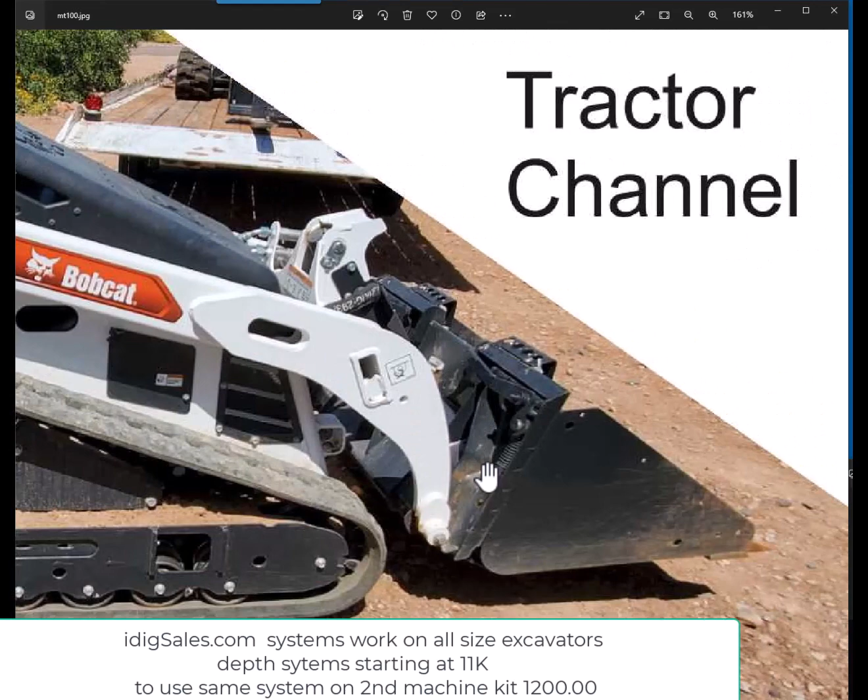But let's get back to this mini skid steer and go through what this first video is going to contain for you guys - it's going to be real simple. What we're going to look at, and the first question that everybody asks when you're even thinking about buying one of these, is what kind of mount is on the bucket? What could I mount to that system? Will I be able to use - say I already have a Kubota tractor with a quick attach front bucket - will I be able to use those buckets on this little mini skid steer? And others of you are going, why would you want to use a 5-foot bucket or a 6-foot bucket when, okay, the beauty of these machines - this one right here is little under 36 inches wide.

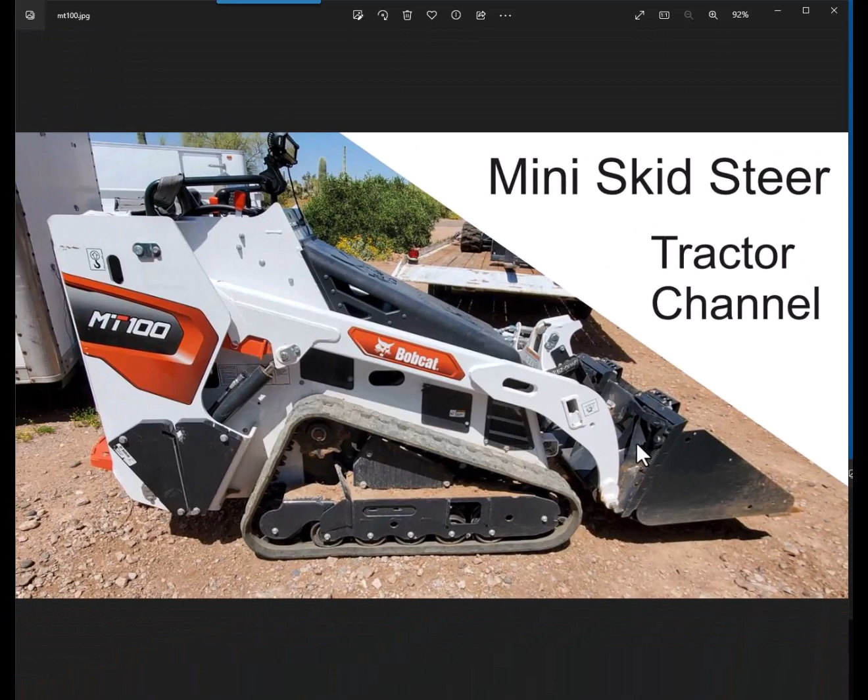This one actually has the narrow tracks on it. You can get a wide track model, I think it's 42 inches, but this bucket is 36 inches wide from outside to outside, so you can go through some pretty small gates with that.

Now, if you have a 42-inch bucket, 44-inch bucket, 5-foot bucket, or 6-foot bucket off your skid steer or tractor, say you've got to do some work in somebody's backyard. Well, you can put your fork attachment on here and put your bucket on there, and then have your bucket going long ways, go through the gate and use it like that. There's a lot of different scenarios why you would want to actually do that.

Let me show you one here. Say here's an MT100. This has got a 60-inch bucket, and this bucket is actually an old Kubota bucket that came pin style, that we actually welded a quick attach onto just to be able to use it for something, because the tractors get converted to the quick attach, and then these old pin buckets aren't good for anything. But anyways, this is a 60-inch bucket.

So say with this mini skid steer, mini track loader, you want to maybe move dirt with it, and you're loading it with an excavator. Here's a pile of dirt, there's an excavator sitting right behind it, and the guy's taking the dirt with the excavator and putting it in this bucket right here. Then they're able to move a lot more dirt with that 60-inch bucket versus the 36-inch bucket that you would normally have on there.

Now, if you were going to actually do some grading and some real dirt work with that, I would put the 36-inch tooth bucket back on there. It's going to do a lot better than this big, huge bucket. This isn't even a tooth bucket, but for loading and moving dirt, this bucket's really good because it has a real good capacity and it's easier to load with the excavator.

Now, another thing to show you here on this one, this is a tilt mechanism off a full-size Bobcat or regular size skid steer loader quick attach, which means it could actually tilt this bucket left or right. And you can see how much wider it is in the actual configuration of the mini skid steer itself.

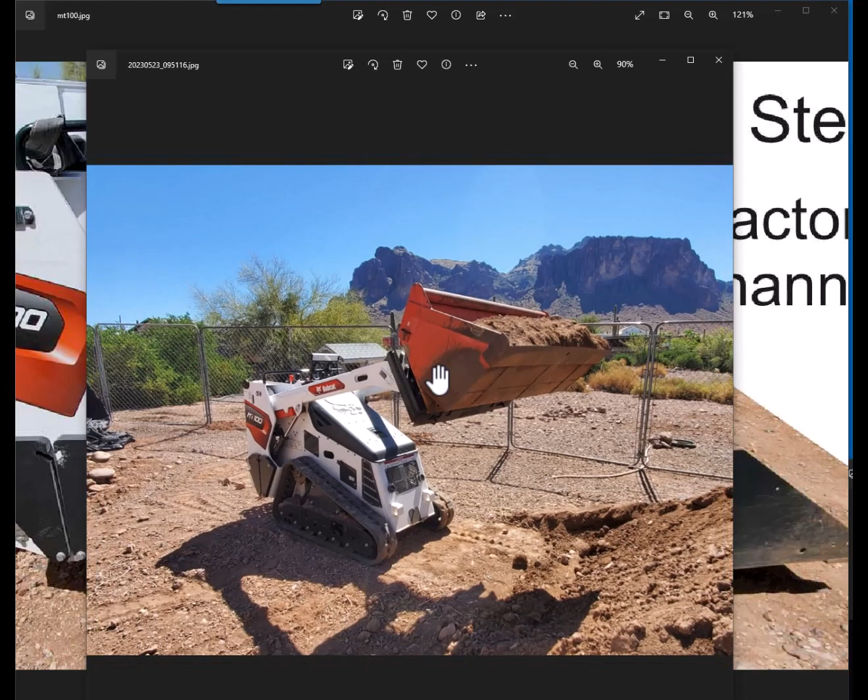But all I've shown you here with this picture is, if somebody asks why would you want to put a big bucket on, well, that's the reason you'd want to put a big bucket on, or you might want to even put on a full-size grapple on your machine. But let's get back here.

What we're talking about here is this comes with a mini skid steer quick attachment system. Now you see these two levers here, just like the full-size skid steer, just like your Kubota tractor, just like your Kioti tractor, but this is only 30 - this whole male mechanism that goes in the angle on the top is not quite 36 inches wide. This bucket's 36 inches wide, so this part has to be less than 36 inches wide.

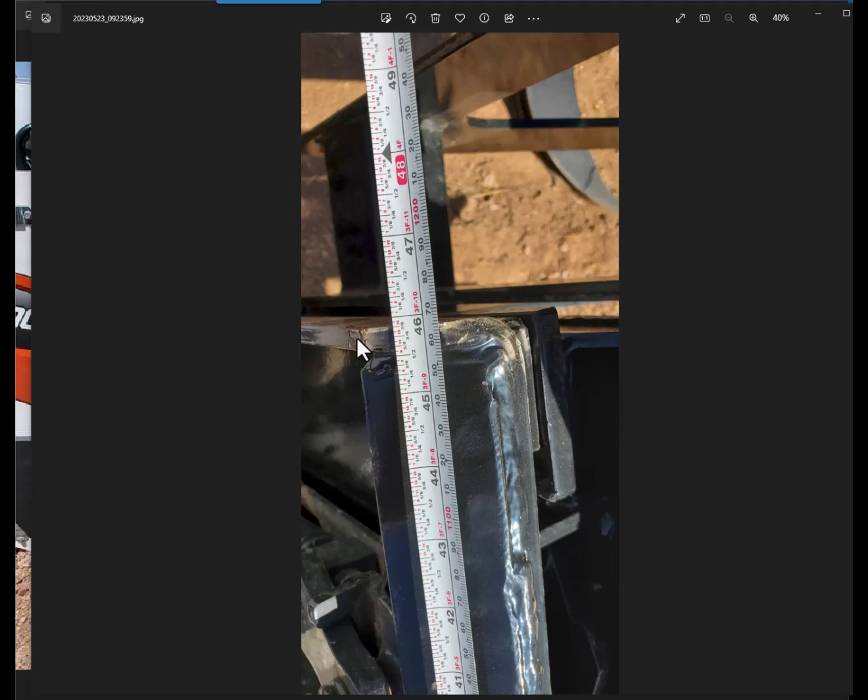So what is the size of a normal one? Let me bring this picture in right here. So this is a normal size skid steer looking down from the top at where your quick attach hooks up. Here's the edge of it right here. You're about 45 and a half inches, which is the widest hookup you would be able to get into that type of system.

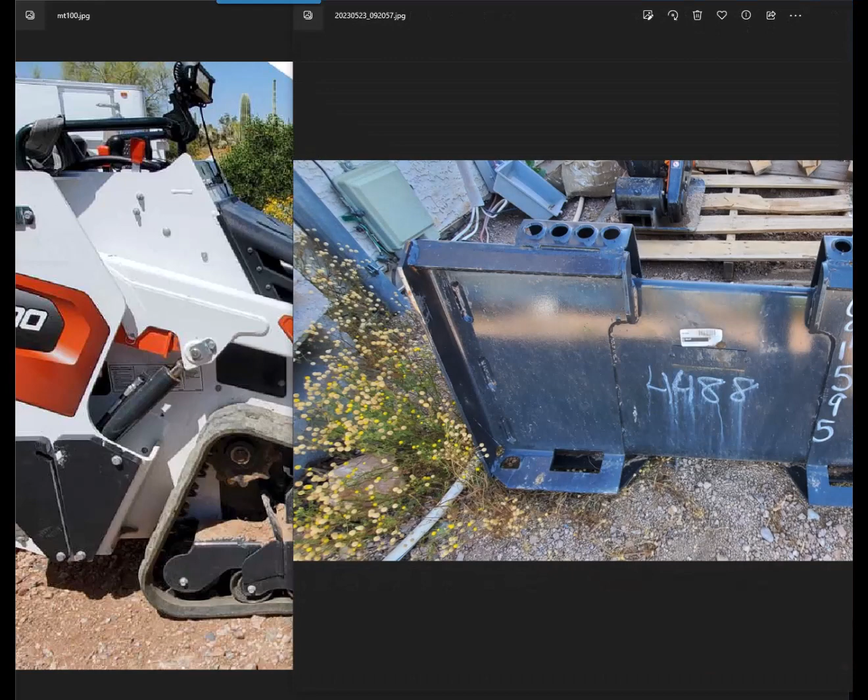Now what I mean by that is when we look at this picture, this is a mini skid steer - well, it's an attachment, I think it's an attachment for the hydraulic hammer. So a hydraulic hammer would mount to this.

But what I'm getting at here is between these two edges, you would have to be about 35.5 inches to be able to hook up onto this. If you went into this with a full-size skid steer, which you're going to be at like 45.5, you're not going to be able to hook up to a mini skid steer bucket. I'll show you here, this picture right here probably explains it a little better.

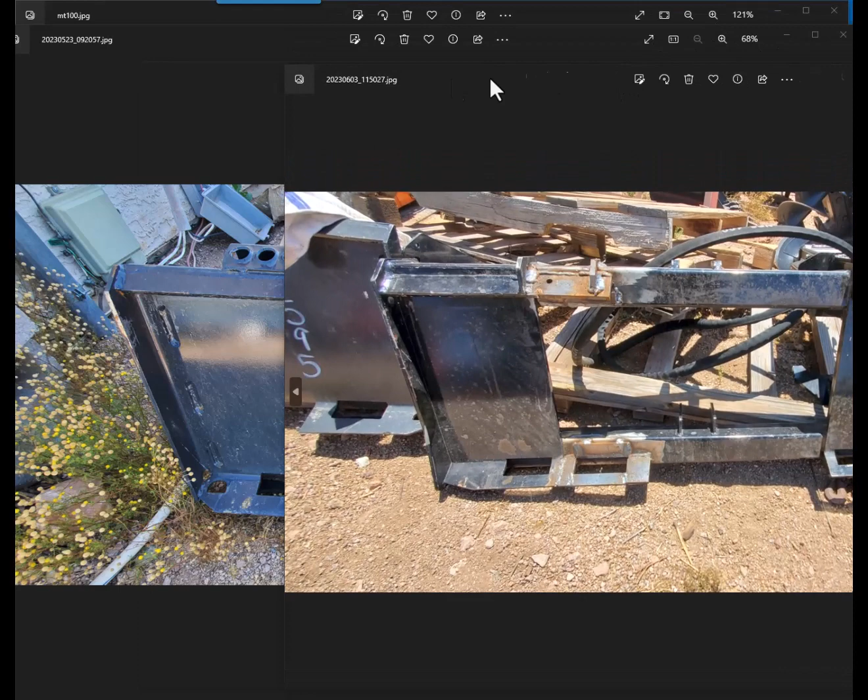Okay, so in this picture, we're looking at a Land Pride low flow auger, post hole auger. It's kind of hard to see, but the auger part and the bits are right over here on the right side. This is made for a full-size tractor, like a Kioti or Kubota. If you look at it, you can see there are 3 holes on the bottom here. The 2 on the outside were there, they came with the 2 on the outside.

The reason being is that your Kubota and Kioti tractors, for hydraulic flow, are probably putting out 6 to 9 gallons per minute. It's low flow. But the Bobcat MT100 puts out about 12 gallons per minute, so you're able to use this on the MT100. It works perfectly fine. Now if you wanted to use that on a full-size Bobcat, full-size skid steer, you're going to be having too much flow, because a full-size skid steer puts out a lot more hydraulic flow.

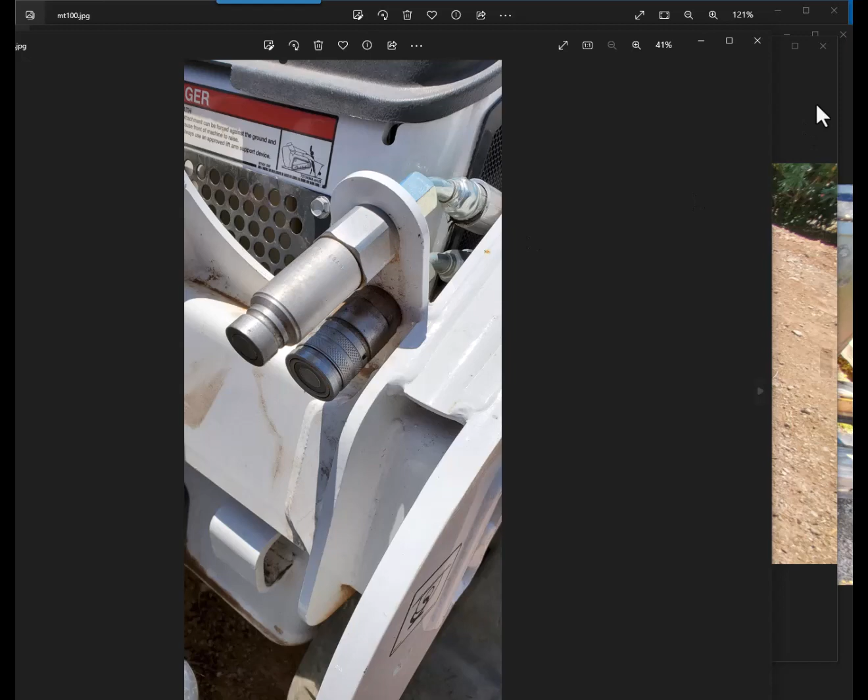What I'm talking about is these auxiliary hydraulic connections right here. That's where you're going to get your flow for anything you hook up to the front of the MT100, hydraulic-wise. Here's an actual picture of the front of the MT100, and this is what I'm talking about: the width of this hookup plate for the quick attach is going to be less than 36 inches, whereas the other ones are going to be bigger.

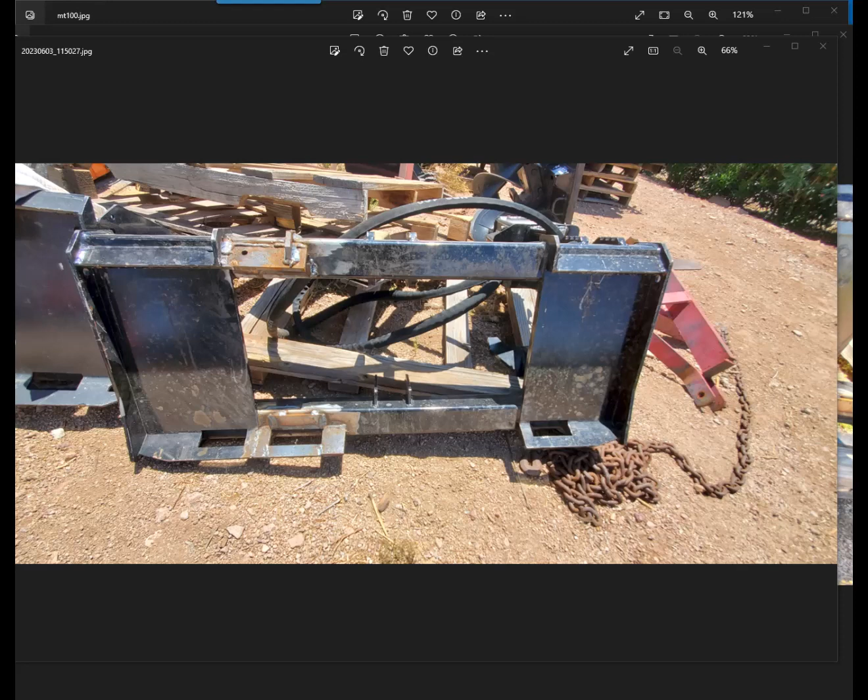So if you can, you can modify some of your old implements if you want to keep using them, provided that the MT100 has enough hydraulic flow to be able to use it like that. And then there's another situation you get into, let me see if I have a picture of this.

Let's look at this picture. This is a hookup, and this would be the same on any of your mini skid steer, quick attach type of system. Now Dingo, the Toro, those are totally different, and it has to say mini skid steer or mini quick attach to be like what I'm showing you here. But this is actually one from Bobcat. I think this is an adapter plate, but you can see down on the bottom the 2 holes that hold everything on, and up on the top you have your angle bracket.

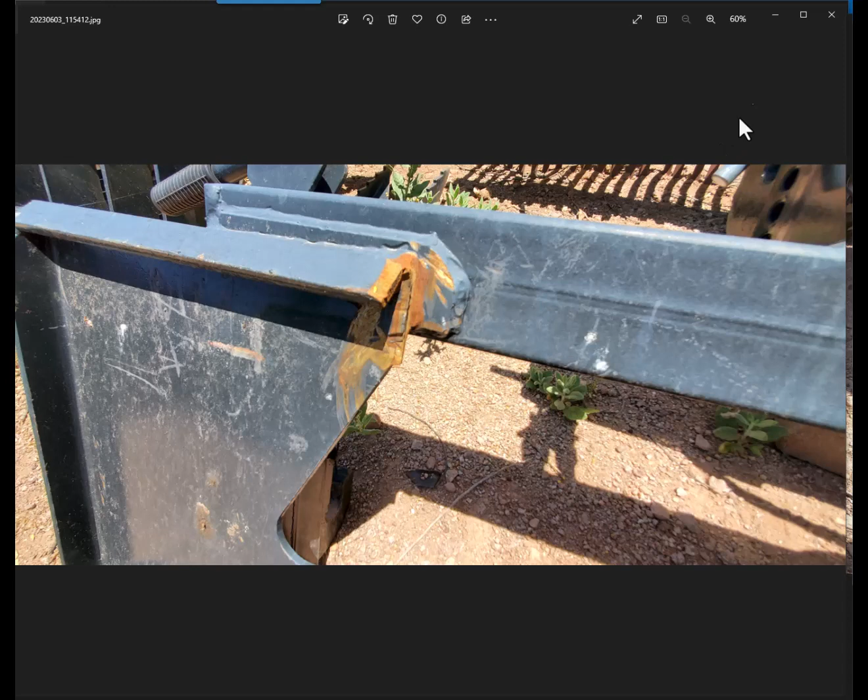You'd have to notch these out. Some implements are going to come with a plate welded across here. If you have, say on this mini skid steer bucket or attachment right here, you would have to notch that out because your full-size skid steer would be too wide for that. It wouldn't hold in there, and it probably wouldn't hook up on the bottom very well either.

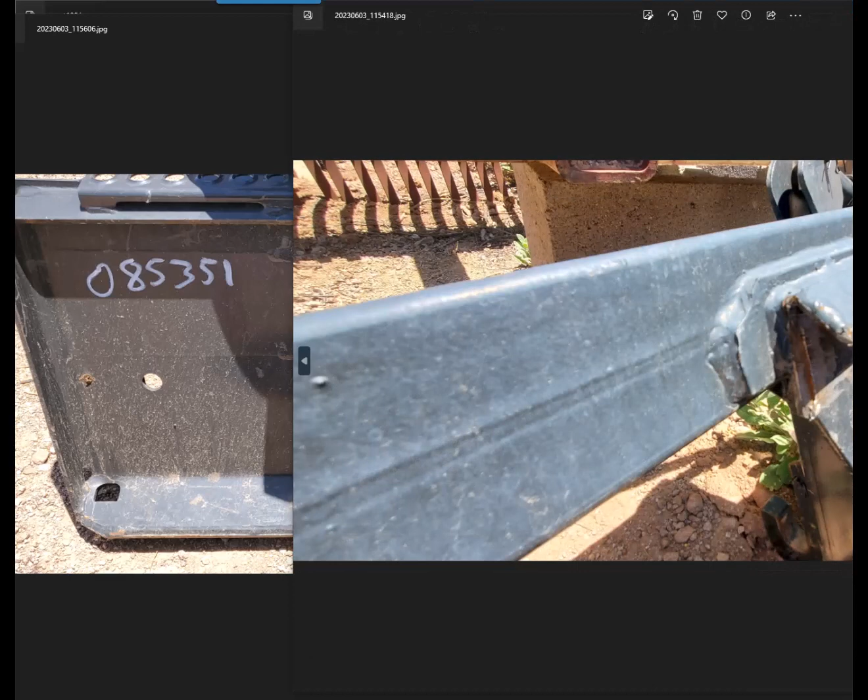Here's another picture of kind of what I'm trying to explain to you here. This is a side shot. Now, this one to use on the mini skid steer, the end of this had to be ground out. You see this triangle part right here? Then the mini skid steer could hook up to that. So it's easier to use a grapple, a bigger grapple off a skid steer or a tractor, on a mini skid steer than it is to go the other way, because you really don't want to be cutting those buckets. Let me show you here.

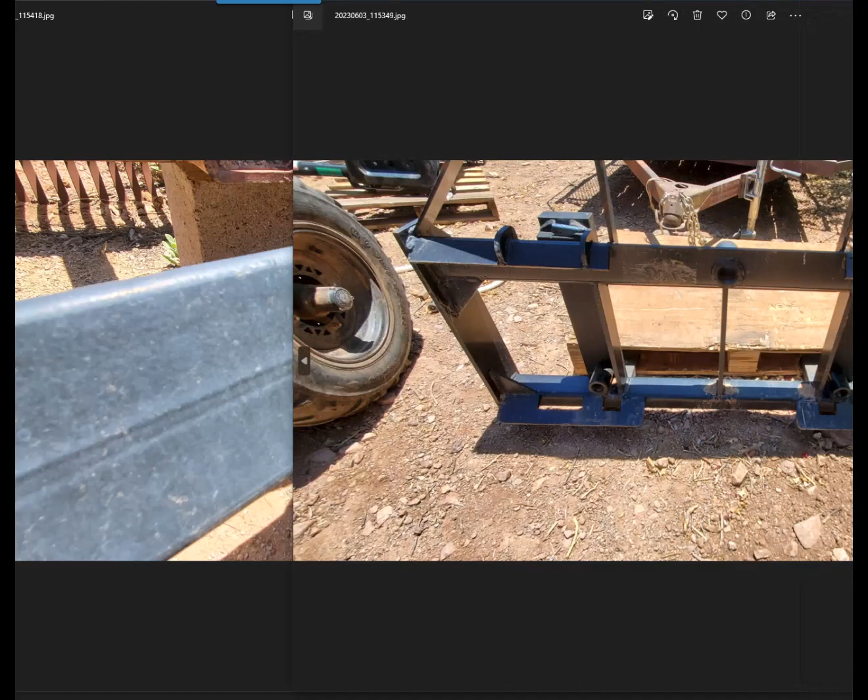This is a forklift assembly, which would work on a full-size skid steer or a Kioti tractor or Kubota tractor. And if you look at the bottom, this plate has 2 holes on each side. So this forklift adapter, this worked perfectly on the mini skid steer, and it works perfectly on a full-size skid steer or tractor, just by the way it's made.

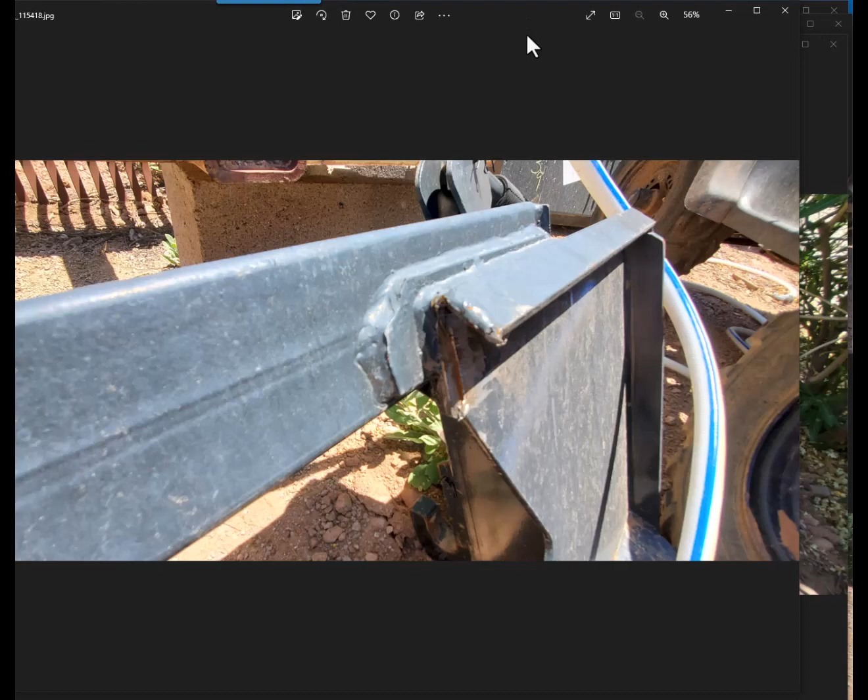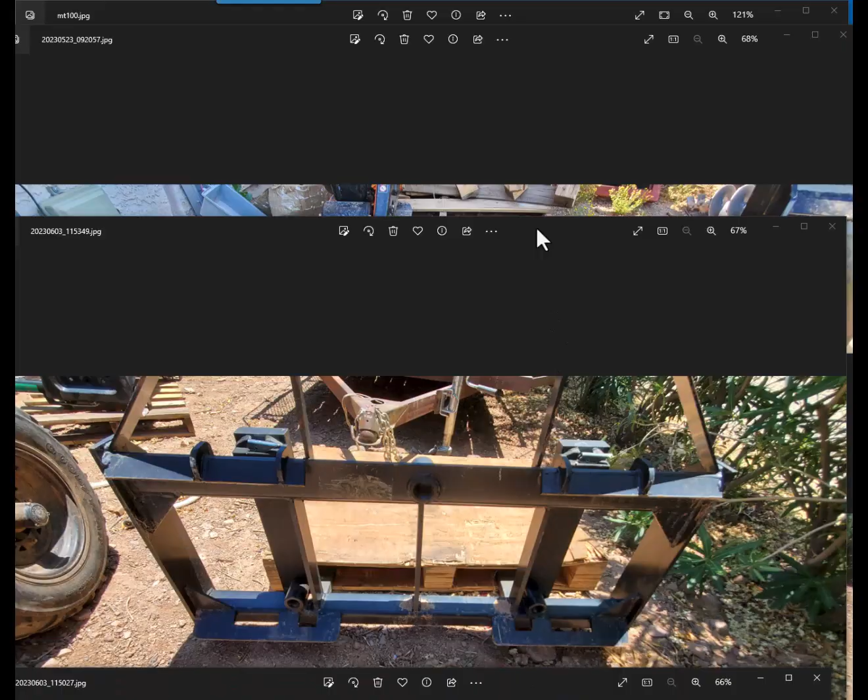And like I said, when we had to modify this to work on a mini skid steer, let's see, if we take this, okay, let's get rid of that one. But here's the forklift attachment that works just fine. And here is the one we had to modify. See how we had to add this part to it on the top and on the bottom, and then on this forklift attachment, all this stuff was already there. So that was great to be able to use that. Didn't have to modify it or anything.

So one other thing in this video I wanted to share with people is sometimes on these mini skid steers, it's kind of hard to get the hydraulic lines loose on these things for some reason. I don't know if it's because the hoses are shorter, or we're in Arizona too, we have a ton of heat here, so it's going to build up pressure in the lines.

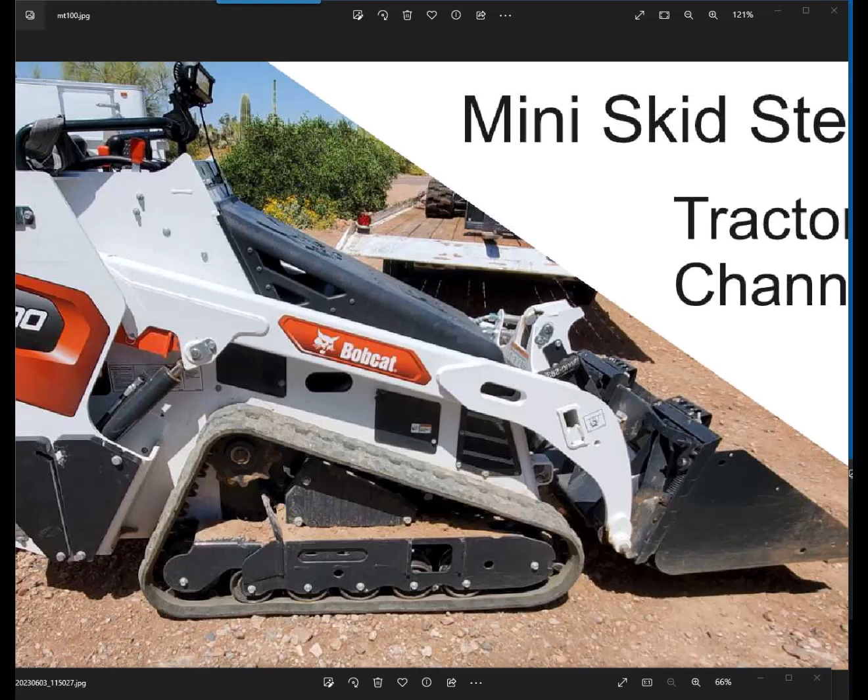Let's say, so here's the operator's platform on this mini skid steer, and this lever right here allows you to control your grapple, or open and close a bucket if it's hydraulically controlled, or a post hole digger. You can do constant flow by pushing that. There's a pedal on the floor, you can push that pedal and then move that lever forward, and that flow will continue to dig, or go backwards if you pull it backwards, however you want to do that.

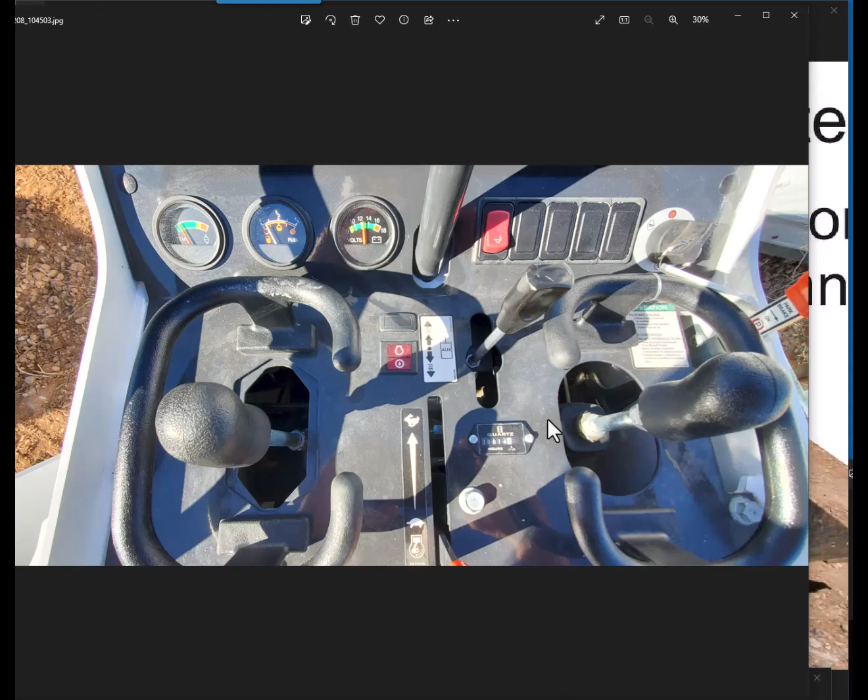But anyways, when you look up there and you see this red switch, that switch is a hydraulic pressure relief mechanism. And what it does is you don't have to have the hydraulics running, but you do have to have the key on for this to work. So what you do, here's the key over here on the right, you turn the key on, you press this button and hold it in, and then you move this lever forward and backwards. And what that's going to do is relieve the pressure in your hydraulic hookup on the front of the MT100.

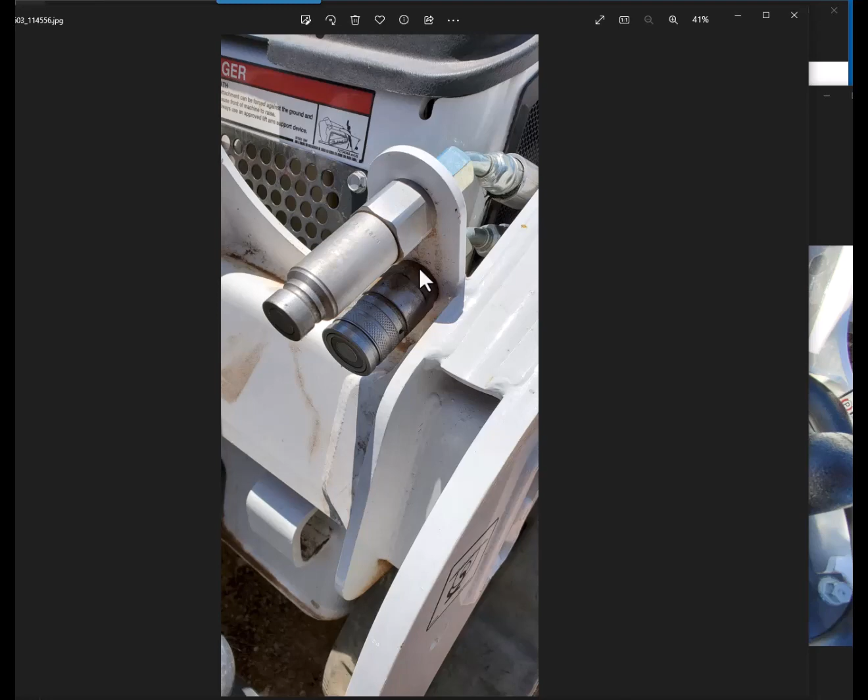That's going to be these, let's see, where are we looking at here, that's going to be these deals right here. So if you're trying to hook up and it's too hard and you can't do it, if you turn the key on, push that red button, and then move that lever right here, forward and backwards, you're going to be able to relieve that pressure, and you're going to be able to make your hookup a lot better.

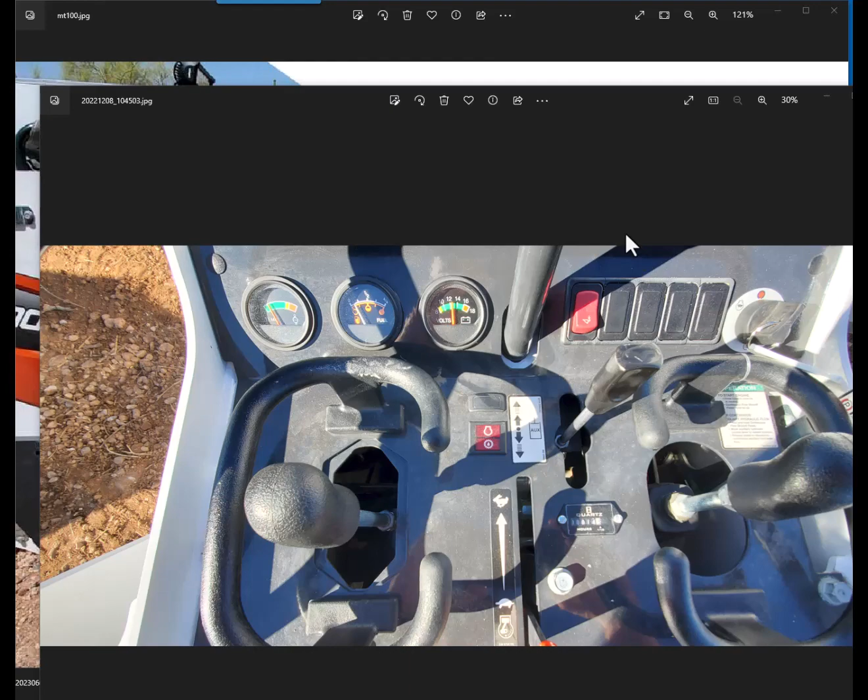People ask, do they tip over easy? I'm not going to really say they tip over easy, but they are only 36 inches wide, so you really do have to use your head. You have to use a lot of common sense. You should use a lot of common sense when operating machinery anyways, so you don't damage somebody's house or fence, or hurt one of your co-workers.

But if you're traveling on a hill with a grade, you want to try to go straight up the hill or straight down the hill. A lot more often than you want to go sideways on the hill. And when you've got dirt in that bucket, you're going to want to definitely keep your bucket as low as you can, and that's really going to help your stability of the machine a lot.

There's a lot of things, though. When you learn to drive, you learn to follow your skid. If you're skidding on ice, you learn you want to follow your skid to try to get out of it. Same way, if you're going on the side of a hill and you even think this thing is going to tip, say the left side is lower and you feel it starting to tip, first thing when operating on the hill, you want your bucket as low as possible, but you might have to abruptly turn downhill to right the problem, because they literally will tip. You feel these things tip a lot, and you kind of get used to it, but there's just a lot of things to know when operating these narrow track loaders.

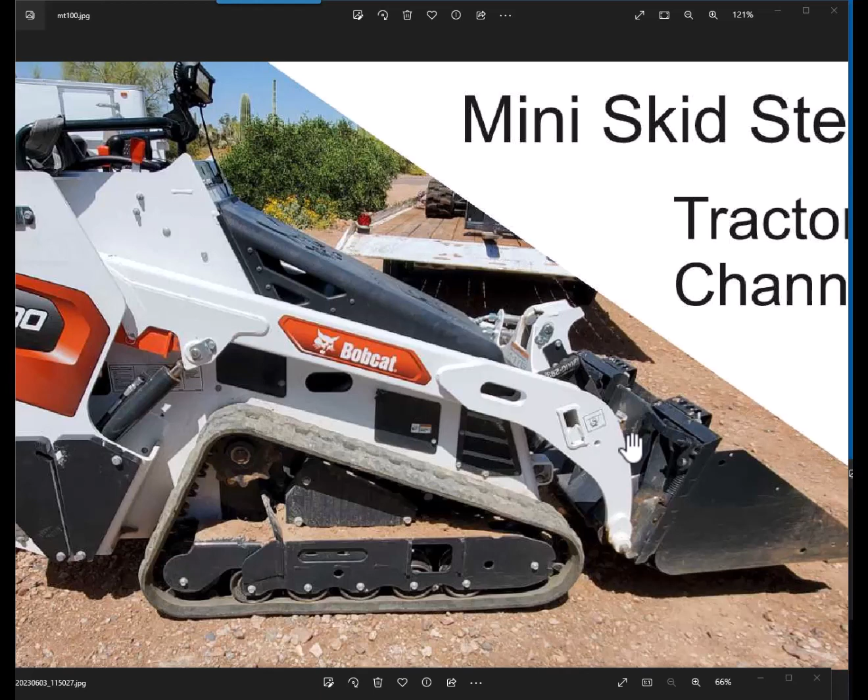This is just a little extra for this video to show you that this machine really can do some work for a little machine - the capacity.

I was also going to point out, now this one, when it came in, when I bought the machine new, it came with these two weights. If you look down in the tracks right here, there's two weights, and also on the back of this, you see there's two more weights mounted. So this machine is set up with the first weight kit, which is 4 weights - 2 on this side and 2 on the other side in the track mechanism here. So those are called your forward weights.

Additionally to that, another option was to buy 2 more weights and put them on the back, and that's what these 2 weights are here on the back, the black weights. Now, the reason you do that is it really does have a strong hydraulic system when you go to make a lift, and you can lift something so heavy that the back end will actually start to rise.

So by having the weight kits on there, both of them really help the teeter mechanism of how it actually makes a lift. When you have a normal size bucket, a 36-inch bucket full of dirt, that's not really any problem for the machine, because this thing's capable of lifting 1,000 pounds in normal conditions.

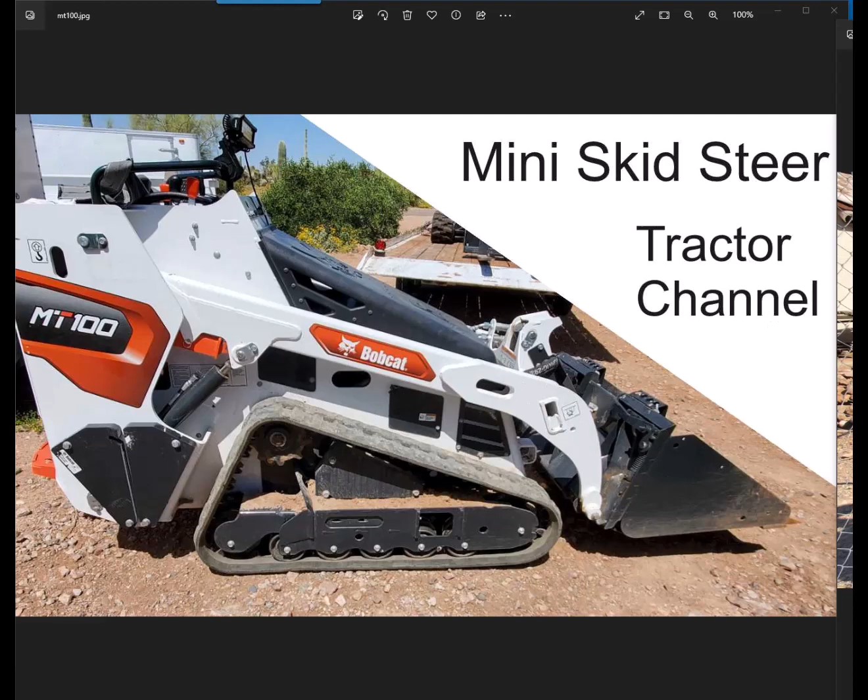But what I wanted to show you is the capabilities - so I do a lot of welding, and what I'm able to do with this is put the forklift attachment onto it. That's actually a standard size skid steer forklift attachment on this one, and you can see how much wider it is than the machine.

Now there's another one from Bobcat, made specially for the mini skid steer, and I have one of those too, and it's quite a bit narrower than this. This is a normal sized one you'd see on a standard skid steer, standard Kubota, standard Coyote.

But anyways, I'm just using it to lift this welder. This welder is sitting on a steel platform, and this is real handy for me because I can take that and put it in the back of a pickup truck, and it stays pretty secure. Because it's so wide, I don't have to worry about strapping the welder down or anything like that.

Another thing to consider with these mini track loaders is you're not going to be able to load dirt into a full-size triaxle dump truck, but you can load into a dump trailer and the smaller dump trucks just fine.

They actually do got pretty good height. Look at the specs of the one you're buying, and of course look at what you'd have to load into your dump trailer - it's going to be a lot lower usually. I don't know how tall your walls are, but a triaxle dump trailer or dump truck is really super tall. It's hard for a lot of the smaller excavators to even load into.